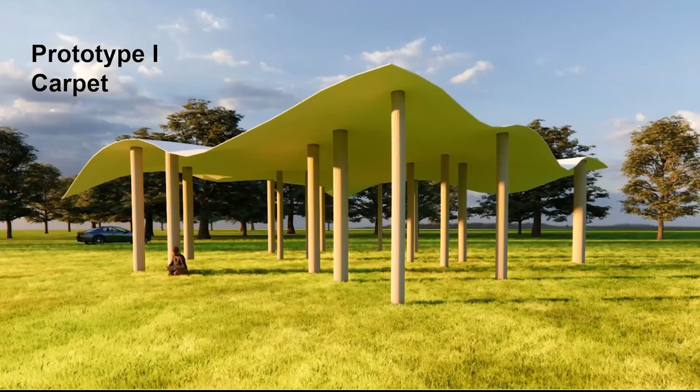So with that, we took on that framework. We built a couple problems of our own to really run through the whole process and adopt this methodology, putting it in a framework that goes end to end, from a user providing ideally a grasshopper model with a tabulated collection of samples, which would be realizations of a model. And then at the end, come up with some visualization and get some models that are of interest to you.

With that first problem, it's a very simple problem with columns located randomly under a carpet-looking roof. We came up with two metrics for this problem - an architectural metric that has a trade-off with an engineering metric. Architecture would be compactness, a way to express quality in architectural terms. The engineering would be simple - economy, pounds per square foot. So with those two, and the model expressed with all those parameters, we boil it down into this latent space that you can navigate and then get out of it a collection of configurations.

If we go to the next one, the other problem was a dragonfly facade. If you were there for the pitching session, maybe you heard something about insects. We did incorporate insects. It's an amazing structure. It's 60 meters tall. Let's go.

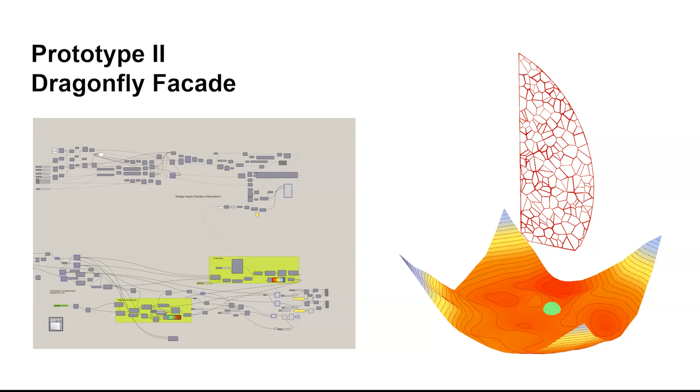It's about optimizing the diameter of the elements of the wing, right? So something very similar in terms that you can express it as parameters. This one is 600 parameters because it's the diameter of every single one of these elements. The other one is much less. And then we showed that one.

Okay, that's fine. We did everything in Grasshopper, but then we boiled it down into a web app that's still in development. Let's go.

This one is in development still, but this is the workflow. And what we really did to the heart of it, the VAE, is to enable it to use a multitude of performance conditions, not just one, because the original authors just had one metric. And then in terms of getting from your explored features back into a performance calculation, they were rerunning their model. So we implemented a neural network to make predictions of what that performance was going to be, just to optimize it.

And I think we can go to the end. The framework is laid out. It's still rough, like anything that comes out of these things. But the idea is to allow a user to look at models with comparable performance to provide their clients with a multitude of options and be able to produce those models with a few clicks and then go from there and leverage machine learning in new ways. Ta-da.

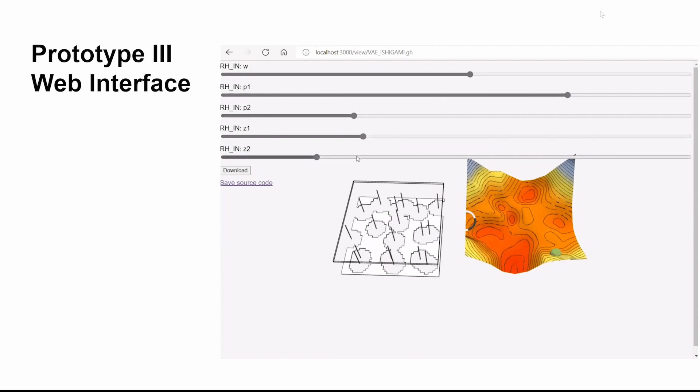Hi. Yes, ShapeMaker. You didn't hear it wrong, because this is a collaboration between ShapeDiver and the Spacemaker folks.

And do I have to advance? Is that what we're gonna do?

And so I'm gonna spend a little bit of time doing a little thing here for Safe Harbor. We're gonna show a bunch of products. There's no promises about us delivering or productizing any of this stuff. Don't make any purchases. There's also gonna be sort of a larger envelope of what we're talking about here. So hold on to your seats, because it's going to be 10 minutes of this stuff.

So we did some Spacemaker collaborations, both with ShapeDiver and with TestFit. What you're seeing right now is a Spacemaker environment with TestFit objects and ShapeDiver objects in the same environment, getting environmental analysis in real time. And we'll unfold how that happened.

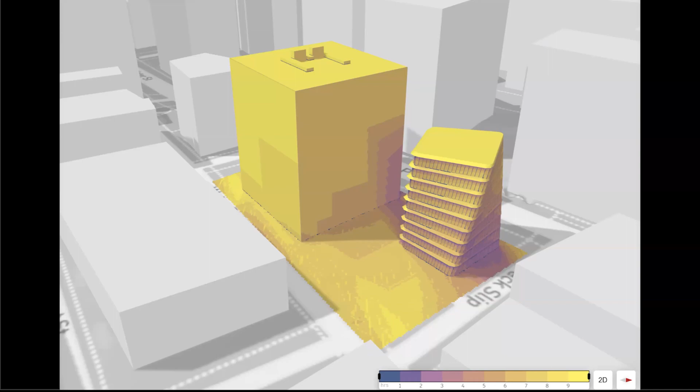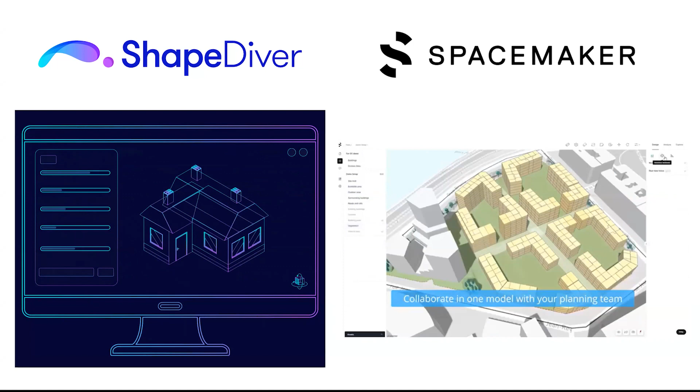Just a little bit about what these two products are before we get into TestFit, which you'll see in 5 minutes. Spacemaker is a cloud-based analysis and design application for early stage design, but we're expanding, where you can position your project someplace on the planet. You can get context for what it is. You can get environmental data on it. You can do your designs in that environment to get impact statements about what your design decisions do for the performance of the building.

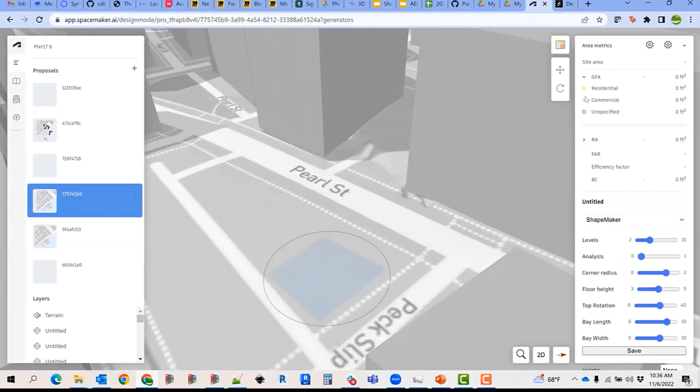ShapeDiver is essentially a very simple way to run Grasshopper models in the cloud and plug them into other web applications like Spacemaker. And so the thing that we accomplished was we took ShapeDiver applications, we plugged them in through the API that is emerging right now into generators, so that you can take sort of arbitrary black box data that's coming from ShapeDiver, generate it inside of the Spacemaker environment, get whatever analysis that definition delivers, and then layer on top of it whatever analysis you want to get out of Spacemaker.

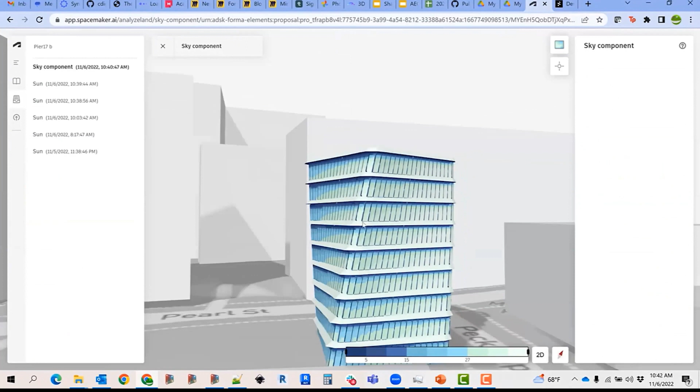So a lot of shapes and spaces and all the rest. ShapeMaker, Spacemaker, all the things. But anyway, it's about sort of how do we start getting these different superpowers all together into the same environment.

The team, there's sort of more names on here than is probably up here, because there's a lot of overlap also with this group down here, which we're going to talk about with TestFit. Really a wonderful collaboration from my point of view on people who had never met each other, getting together into a room and just making some awesome shit.

A lot of what kind of tied this project together is a shared vision about what's important. Automation, amazing. There's usually no single right answer. It's important to be able to see options. Both products are sort of about that. Web services make everything more collaborative, and all these environments really need to be built around the idea of extensibility and customizability.

And so we really looked at this and we thought, what would happen if you can take encapsulated logic and put it into a design environment so that you can share it with people, so you can get more of a collaborative environment for people to work together for sort of performance-based outcomes. And just talk a little bit about how that was put together.

Yeah, so we can build all of these nice web apps which cover a use case, and it has cool AI analysis in the background. But for our community and for anyone here to be able to use it, you have to be able to hack it, right? You have to be able to do these bespoke buildings that we do, and any web app is never going to cover all of that stuff, right? So we need to basically allow people to plug in whatever they want in the back and then display or run the bespoke analysis.

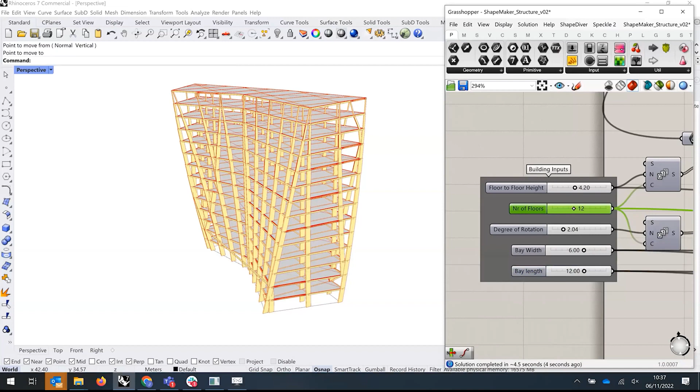Yeah, absolutely. So just to confuse you even more with more names, more platforms. This is basically, if you don't know ShapeDiver, we all know Rhino and Grasshopper, probably. This is the desktop side of authoring your definition. And what we're looking at here, although it might not show up in the videos and the visuals, we are actually

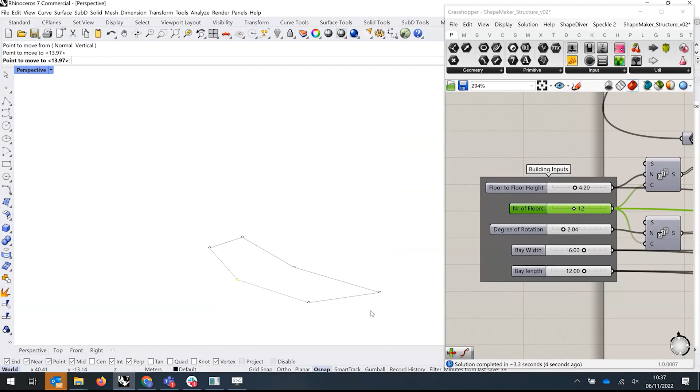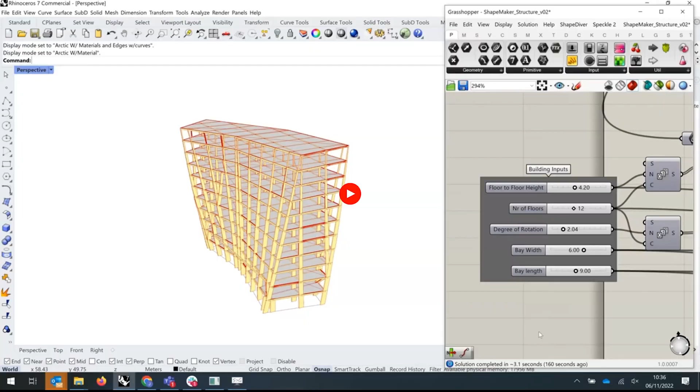generating the structure. The sizing of the columns and the beams is actually calling into Cortex, our AI machine learning model here at Core Studio, through some REST API calls. It pushes basically the geometry, the length of beams, loading, gets the size back, and reports that visually in the 3D viewer. Because of ShapeDiver kind of appifying these Grasshopper definitions, we're all of a sudden able to run them on the cloud anywhere.

So once the Grasshopper definition is ready, we can upload it on the ShapeDiver platform and already get a preview of it, get the API keys and plug them into Spacemaker.

And so I think we'll just play ourselves out with a sort of slowed down video of what we're doing. How much time do we have left? Are we totally out? All right. So thank you. We'll do questions.

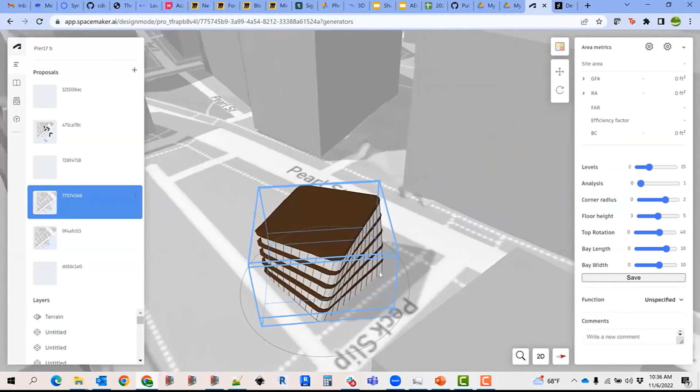You guys have already sort of seen this at high speed, but this is sort of the full workflow of all these glorious pieces of technology coming together in one environment for the purposes of analysis and getting data from your design workflows.

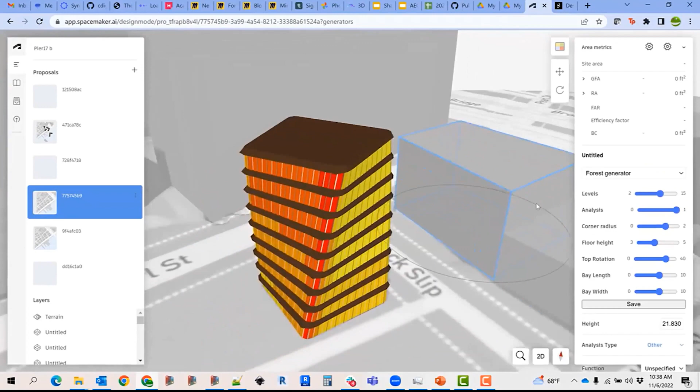I think we can take some questions just sort of as you are scintillated by the glorious demo. Thank you. Thank you. So are the, oh, I've never been accused of being shy.

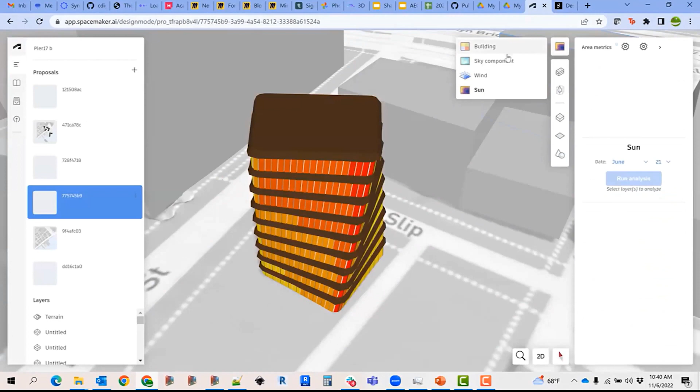So earlier in the video when we saw those parameters and the sliders on the side, are those getting pulled from the Grasshopper definition? Okay, all right. And then you're essentially allowing the user to control them from here. The definition computes and then it gets the results back here. Got it, okay. It's pretty cool.

And theoretically, that's kind of that example. It would be kind of the same framework if you plugged in, like you said, a TestFit solver or even another kind of solver. Okay, cool. Yeah, on the geometry that you actually get back. Got it. And part of the point of it also is that users don't necessarily even need to know where logic is coming from in order to get the functionality.

It's a little small in this view, but I also want to point out opportunities for personal branding that happen within the Spacemaker environment for other applications, if you want to surface the idea of where this comes from and who is responsible.

All right, hopefully this has the videos in it. So we'll go through these slides pretty quick so we can show the demo. We're team schema test. We're from TestFit and Spacemaker. Again, safest of harbors. We're scared of lawyers. We come from large companies. This is hard enough to collaborate as is. So no products, no features out of this, at least no promises.

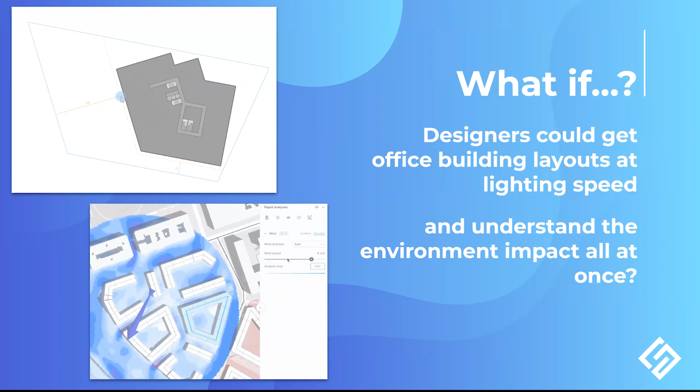So we have a shot, I think, at getting daylighting analysis, microclimate analysis, wind analysis, things that corporations care about for their employees. They want their employees coming into the office. I know we're in the post-office world, but Wells Fargo, for example, announced a massive building in North Texas. So I see a shot at marketability for Spacemaker's neural nets with office, and I also see a shot at marketability where we have instantaneous generation. Cool. Next slide.

So what is TestFit and Spacemaker? TestFit is automated design or feasibility design. It's written in C, so not C++, not C#, but just C. Our engineers are amazing. It's a desktop application, so it's super fast. It's real time. You get that instantaneous feedback that's really important with procedural algorithms. And Spacemaker.

And just to say again, for Spacemaker, the point here is that Spacemaker is different than that. We aren't using that same code base, and we are going to play with anything else that comes along. So just as an example, previously you saw something that was working entirely with services. This is working with a different tech stack. Yeah, so very different on the spectrum of software development or software engineering, completely different products. So yeah, we can go into the live demo now.

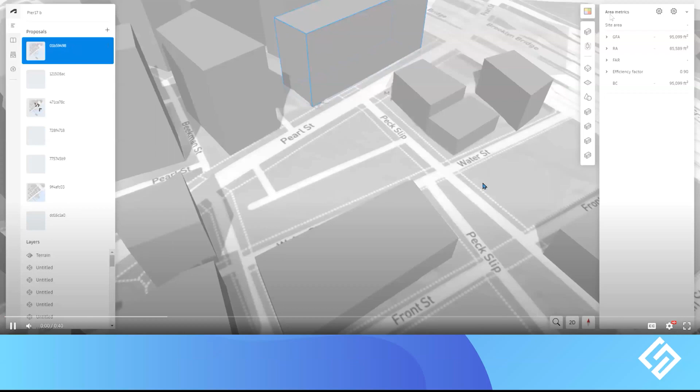Yeah, can I hijack the sharing? Yes. Cheers. Oh, host disabled participant sharing. Yeah. Sure. Ask to start video maybe? Or no, something else. Make host. Oh, okay. Okay. Yeah, I'll give it back. Great. All right, can you see the screen now?

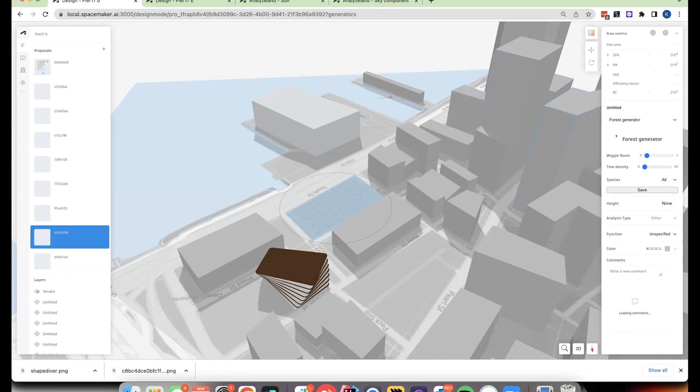Great. So now we're inside of Spacemaker in the design mode here, and let me just remove the Zoom things, they're getting in the way. Okay. So let me just select this plot and select a generator, then choose the TestFit Office generator that we just talked about. And here it pops up running WebAssembly, connecting through our API. And we can change the parameters that they have exposed, and you can see that they're changing live.

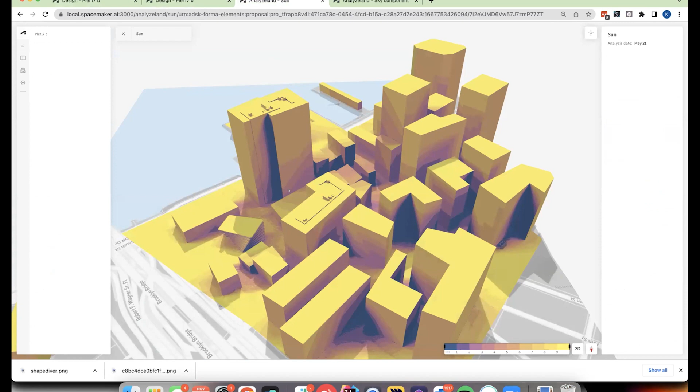Yeah, and I can save them and jump over to, take a second. Let's see, yeah, and then generate another building over here with the other options and stuff like that. I've cheated a bit, because the analysis takes like 30 seconds, and I didn't want to spend time on that. So here you can see our sun analysis being used on the buildings that we just created using the WebAssembly that's compiled from TestFit code. And here's the daylight analysis.

Yeah, so it's super cool to see how responsive this is, running their code in our service. I guess that's a demo. Should I show anything more? Simulations. Yeah. Yeah, okay. Okay, thanks.

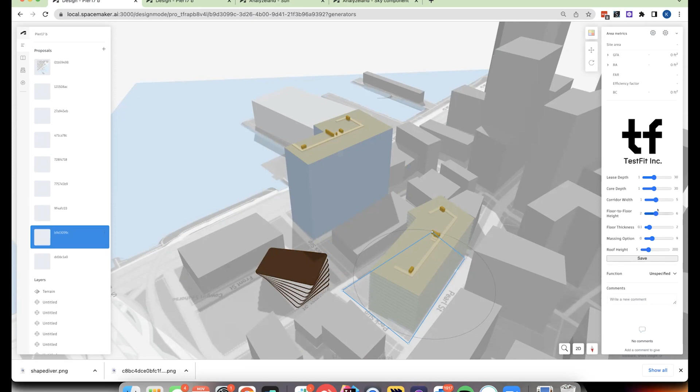So one of the benefits of TestFit is that you guys get like pro forma and metrics out of it. Do you guys incorporate this into this one, or is the data output? We didn't have time to hook it up. We needed another week. Okay. Oh, all right. Thank you.

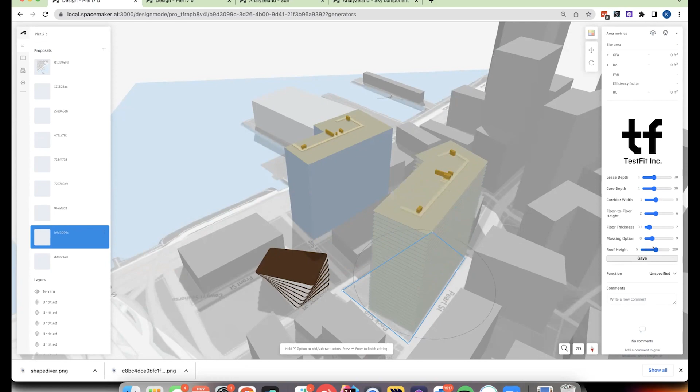So should I stand? I'll stand over here. Hello, everyone. Good morning. So we asked a pretty simple question. What if you could, can you hear me? Yeah. Okay, cool.

So we asked a pretty simple question. What if you could visualize your thoughts, your ideas in 3 dimensions instantaneously? Like what if you could take your dreams for the future and translate them into reality, all starting with a conversation. So this is what we think could be a new paradigm for 3D modeling. And the impact: 3D modeling is a very specialized skill. This could really open up and make design more accessible so that everyone could visualize their dreams for the future. I need to talk more into the mic.

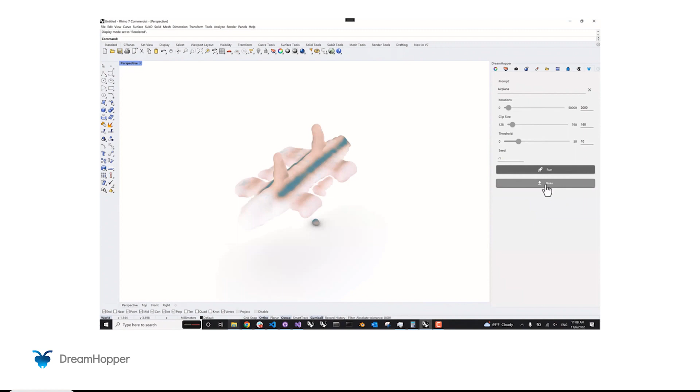Right. So what we decided to play around with is another diffusion model that recently came out that allows you to actually generate 3D meshes as the output. What you're looking at here is a little Rhino plugin that we wrote that allows you to call into that model. The model is running on the server, and we're able to interact with it through the interface of your favorite design software. And as you can see, you can ask it to draw you an airplane, and it will draw you this. But nevertheless, close enough, baby steps.

So can we move forward?

Okay. So we have a server that's serving the model. And because the inference time actually takes a little bit longer than HTTP requests would allow us to deal with, we actually have a Redis cache. So the way it works is, the client application submits a request like, hey, draw me a plane. And then the server spins up an asynchronous process and tries to draw a plane for some amount of time.

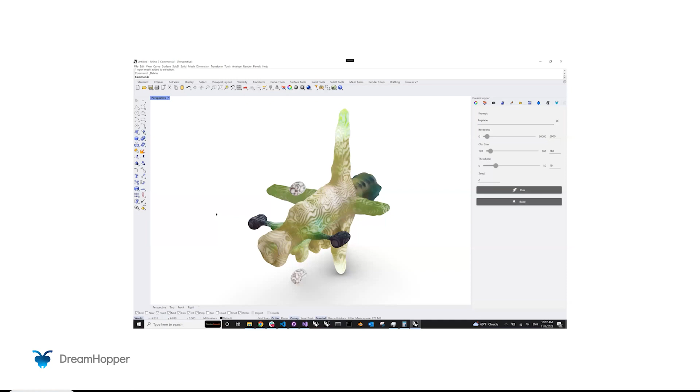And we have a separate route that the client can ping and say, hey, is it ready yet? Is it ready yet? When it's ready, it will be saved in the Redis cache, fetched from there and returned to the client so that you could look at something like this. And yeah, there's some of the outcomes of, you know, it's just very, it's a poetic interpretation of your design process.

Is it? Yeah, you keep going.

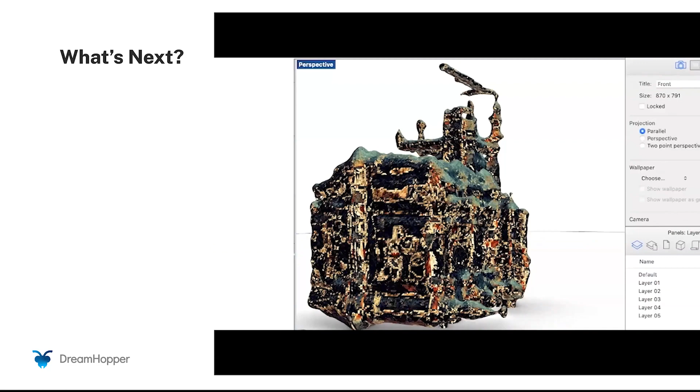So how do you design? Do you design with a pencil? Do you design with a mouse? What if you could design with your thoughts, your words, a conversation with a computer, a dialogue back and forth between talking? And so in this video, saying, okay, generate a building in the style of Dali. What if we push it out, extrude some panels over, rotate around the building, generate some structure, zoom in, and done.

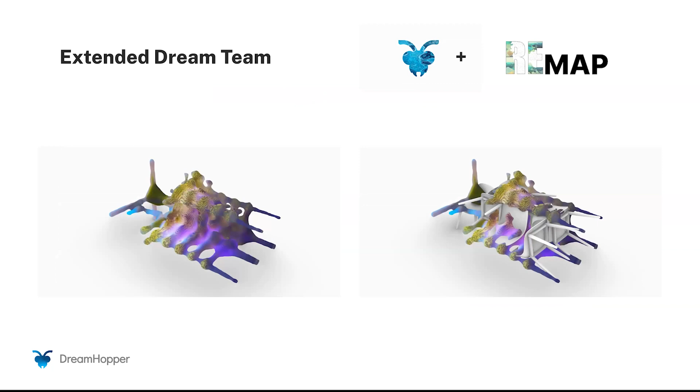So we had the chance as well to team up with the guys from ReMap, and they were really helpful. And we just tested some of these geometries that we generated through AI to populate them with chairs, because why not? How to build them in the office right next to where we're sitting. Yeah, that's pretty much for fun, but it was really good. Thank you very much for helping us with that.

Do you guys have any questions? The ML model that you're running, are you getting polygon meshes directly out of that? Are you having to do any sort of ISO surfacing? What is the data format that comes out of the diffusion model? Technical question. Is it one model that's good for all scales and applications, or is there an industrial design object model and then a space model, et cetera?

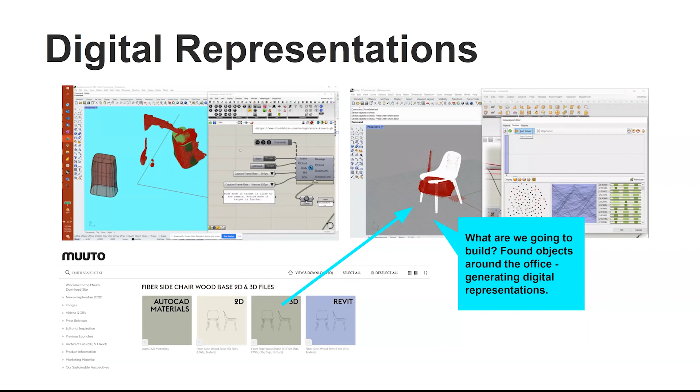So here you can see us bring in on the left the scan and fitting it based on a found object we had recreated and modeled based on some objects in this room. And then on the right side the best fit algorithm that we were iterating on using Grasshopper tools, Galapagos, that James was talking about.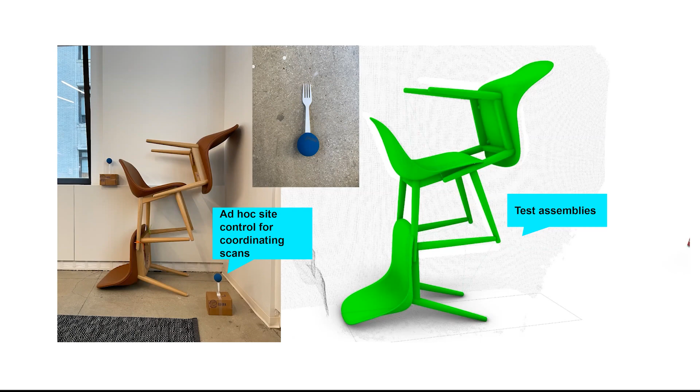To do a quick spiral through the workflow, we figured we'd just do a random stack of chairs. We'd scan them, use iterative closest point, get everything working. And then we also developed some bodega-style survey markers that we use to re-reference the point clouds. So you find the sphere, you can shoot another scan, you can then reorient them together. Results were quite good. So the field tools were a fork, racquetball, cardboard box, paper cube with QR codes on it. And you can see the whole scene there working together.

This is another view of that, looking at the iterative closest point snapping those things really quite tight to the model. Nathan here streaming in from the Kinect into Grasshopper, locating those parts. Do you want to talk about Fologram? Yes.

So we use the ArUco cube in Fologram to identify the physical object to match it with the virtual space, and using Fologram to identify where the current object is and where it needs to be. I think, yep.

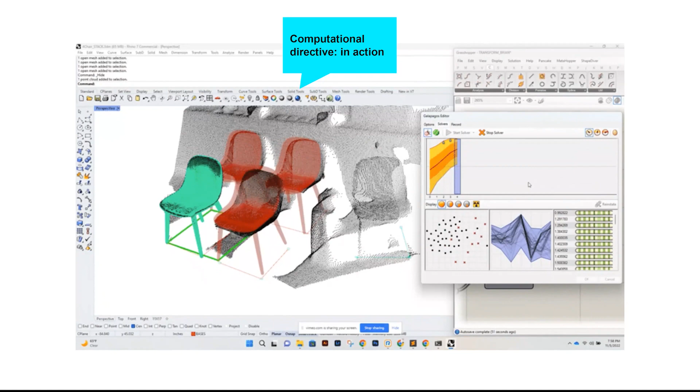One version of what those directives might look like. So here, very simple, we have 4 chairs, and the directive is: from the parent chair, find the minimal amount of movement to square them up. So that's the kind of thing you could think of in the field. You get a general sense of what's happening, and you make the best decision on what to do that minimizes or maximizes or does something good for you.

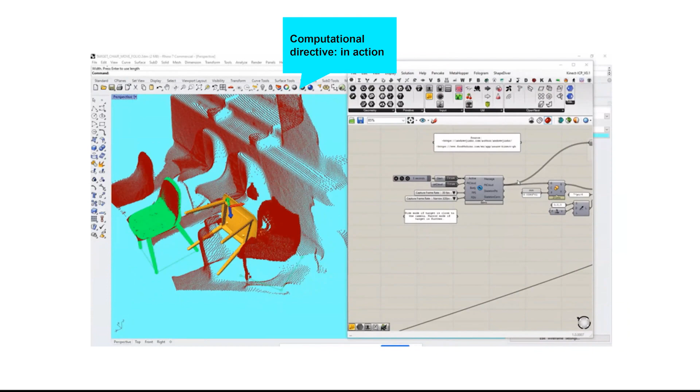Prototype deployment of our found object being oriented to its scan position in space. We had to make some distinction between the other objects so they separate, and then the orientation element directing the chair's movement to its final position was the green one. Yep, and then with the transformation matrix that we got from the previous slide, it got translated and brought into Fologram to view in AR, to direct you and communicate what step needs to be done.

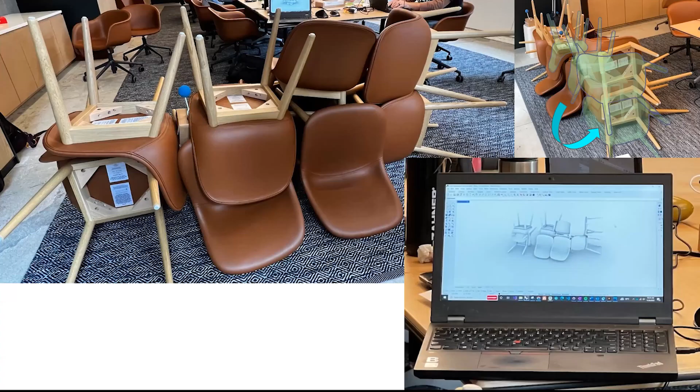So to think about what's next for us, the future is now. We collaborated with the Dreamhopper team and worked on a text-based chair tower configuration. Exactly. So narration to field. So as you can see from the end result, this is something that you would not be able to achieve without the stack of technology that we have put together. We used the computational design tools and the feedback to get the tower that came from Dreamhopper into reality.

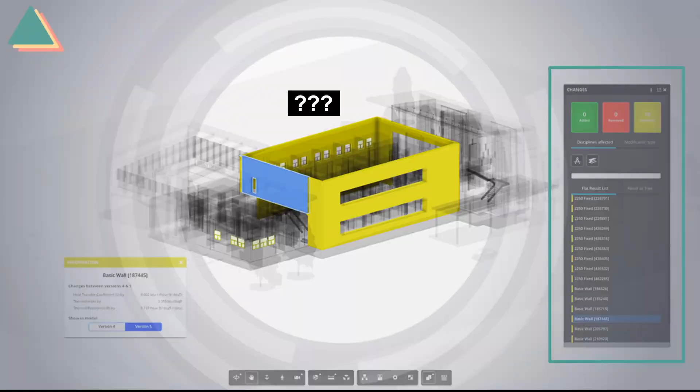So what we wanted to do was understand who needed what information and when. At the user level, the really fine-grained detail of making design decisions, making corrections in the model, and visualizing those changes across time is the highest level. Then we get to what the construction manager potentially needs. They don't care about that fine level of detail, they care about quantity changes. They want to understand how the price is going to change based on those changes through time. And then at the level of a QA/QC manager, someone who wants to understand changes across multiple projects and how that's affecting their entire portfolio.

So we took multiple versions of a real project, generously provided by Matt, and we built 10 files—I'm drawing 5 here. Working with Revit is quite slow, so Vim's got a free exporter. What it does is export from Revit and convert the BIM data into a form that's quite easy and fast to work with. It's got all of the BIM data and all of the geometry.

So using the free exporter, he created multiple Vim files. And then we wrote a script—I wrote a script using a beta API we have with our desktop application. It's 160 lines of C# code. What it did is compare the differences between each of the two Vims, and generate geometry differences and the delta represented as JSON—all of the changes, volume changes, movement, data changes, additions and removals—so that we could visualize that using another format. So we processed about 100 megabytes of Vim data in 5 seconds to create about 200 megabytes of delta information that we then started to process.

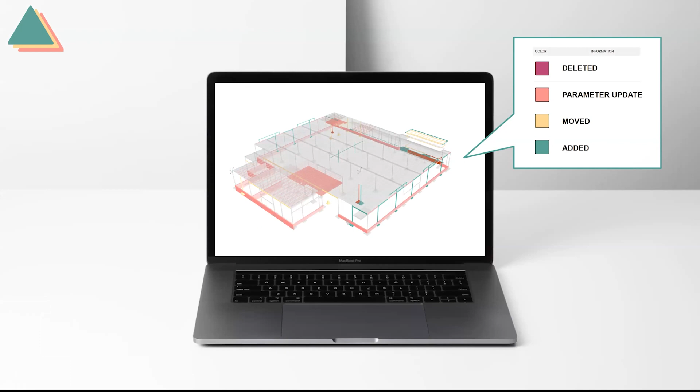One more time, a quick demo of some of the sample models we generated. It's very simple, colors change means there's a different change to the object.

This is a little mock-up of what we were aiming for. Our goal is to allow the user to see graphical changes. It's a standard dashboard approach, but we really want the change step to be the thing the user controls.

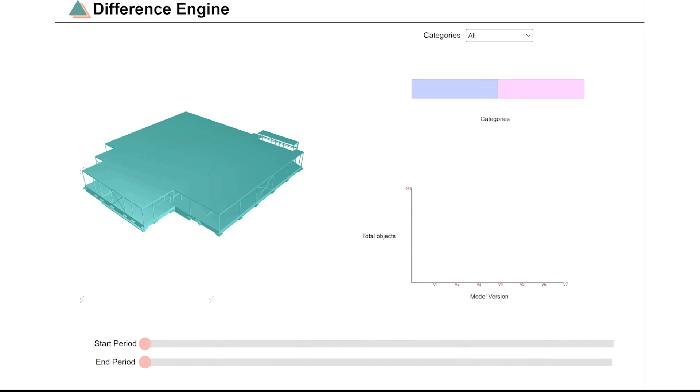Next steps for us - we built this as a Revit plugin because that was the test model we had, but our real goal is a sort of agnostic approach. Anything that can be turned into a JSON can be diffed - it could be ETABS models, Rhino models, Tekla, and many other things.

The key is that we think change happens, and understanding it better is the goal of this tool.

Just theoretically, we were looking mostly in this session at one project, but our real goal is to be able to look at all the projects across the firm. So theoretically, bars across the bottom represent a project.

You have 50 projects - where are the points that changes happen most? Is there some consistency there? Can we make better decisions in the future by knowing when things changed and why?

This is everybody that's up here with me now, as well as Tina online - a very diverse team, mixed backgrounds. We had a great time. Hope you enjoy the tool.

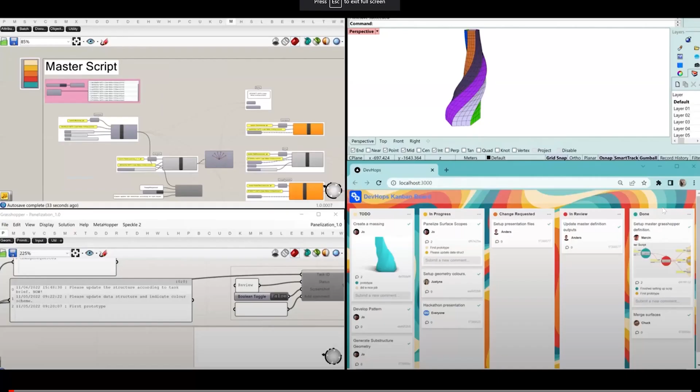Okay, so for the demo, I'll just move to YouTube. Okay, so that's the demo of our product. So basically on the left-hand side, just a second here, you can see two Grasshopper scripts.

The top one is a master script, and this is a direct representation of the Kanban board. Each task is each hops definition, and it has its own status. The script on the lower left corner, this is the actual hops - that's what's happening inside of this function, inside of this task.

So for example, you can see that thanks to RESTHopper, what you will see in a second, I have those different tasks that group into groups. And the coloring is a direct response from the Kanban board about the status. So if the task is in change requested or in progress, it will be orange.

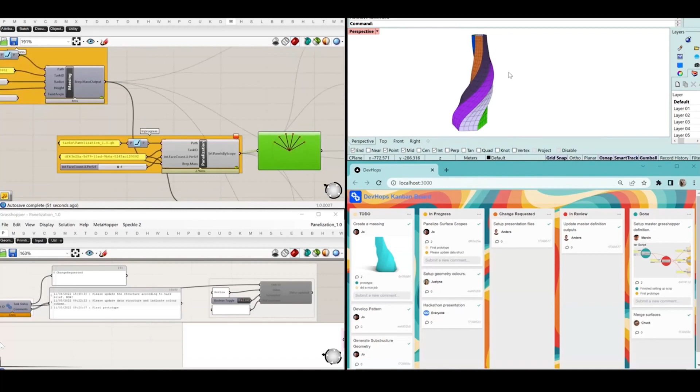So let's say I was a reviewer of the script, I might want to request some changes. So I want to put a task from in progress to change requested because I don't like the result. So now look at the Kanban board - once I send the request, it directly moves the task from in progress to change requested.

Then as a person who works on the script, I can directly read that, okay, for this task I have some changes that I requested, so I need to fix my definition. Once it's fixed, I can post again the results that now it's up for review, and this is done.

And if you look at the board, once I send it, the task should move from change requested to in review. So let's look at the board, fourth column. Yes, it moved. Wow. Okay.

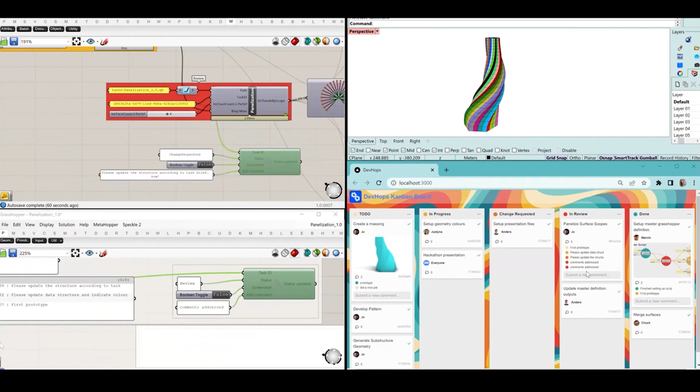Okay, so now as a reviewer, I can come back to my master script. I can see there are changes. If I'm happy with those, I can either approve them in the master script or I can do it directly from the Kanban board. So that's what I'm doing in this example - just write the message, all good, and I can drag down the column and that's all. So both tools talk to our own API, but more about tech in the next slide.

At the end of the day, the five of us all contributed something a little bit different from our own backgrounds to the project. Technically, what we're looking at is a .NET 6 basic server with a database that allows both the front end and the Grasshopper plugin to communicate to each other live.

Both of the clients are polling the back end as they push and make their changes, and as someone works with either the master scripts or is acting as one of the workers working on one of the subscripts inside the hops definitions.

This is all available on our repo, all dressed up nice and available to take a look at - all the different contributions, including the Grasshopper script with some of the most intense care and attention to neatness I've seen in a long time. All available today with a QR code, so you can actually download it right now.

This is us proving that we are all, oh, did you see it? Oh yeah, this is what we want to look forward to in the future.

Things that you could imagine could happen within the next hour or so, if only we had the time - is testing after changes happen, or of course, using this history to actually show it in some way as things changed over time, and so on and so forth.

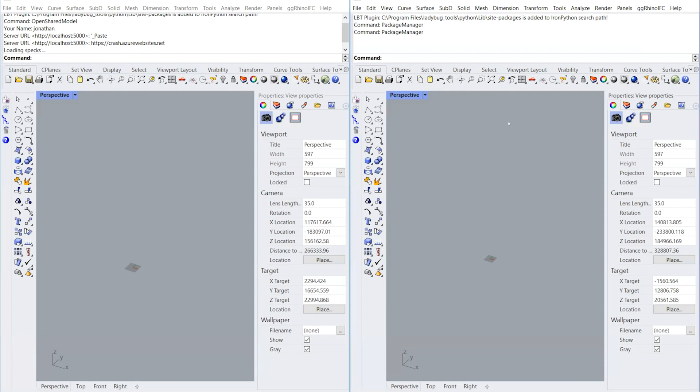So we have here two Rhino instances running. On the left side, I already subscribed and started the server. On the right side, I can quickly show you. You can just open up the package manager, and you can see right now it's installed. When it loads, we have crash here. So I open the shared model.

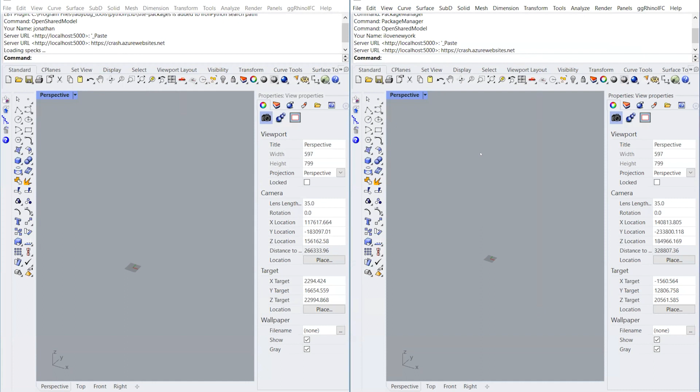I type in I love New York. That's my new name. And I subscribe to the server, and there I am. So now I can start drawing into the pipeline, and hopefully, nothing appears. So probably crashed. Let's see. We have here Curtis, Morteza, and Moustafa at least that came into the model. Let's see what they're drawing. It looks like on my left side, the subscription doesn't work anymore.

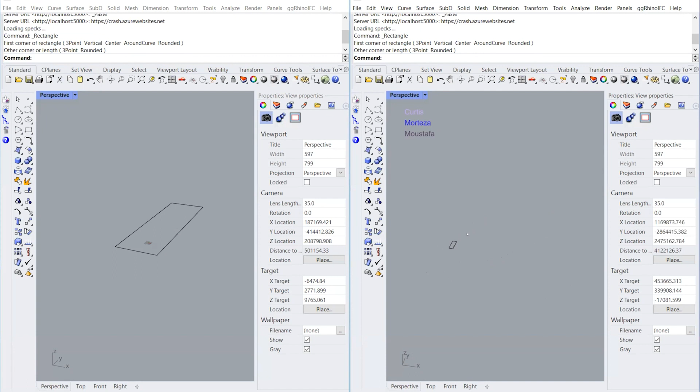Are you guys drawing something? Yeah. Do you see? Okay. It seems like for everybody else, it's, I am just zoomed out all the way. So let's see what they're doing. We have here our users. Everybody is working on it. We can add and modify things together. And once we are happy with our changes, we can release them, and they're getting baked into the Rhino model and released to everybody, basically.

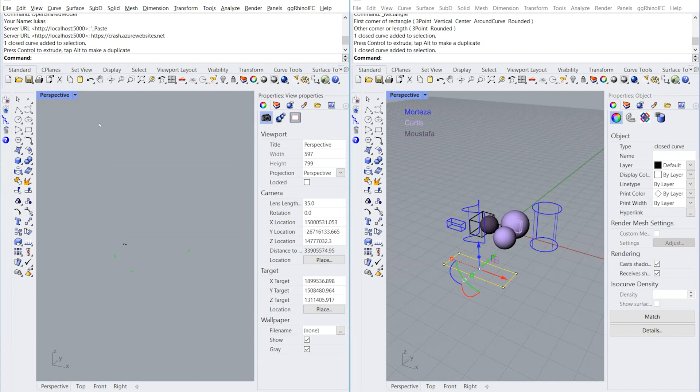So yeah, it's a shame that I can't show this one here. Let's see if I actually can show it in real time working. It's really fast. So I would be sad if we can't do this. Let's see. No, that instance doesn't want to work. No. Otherwise, I would see the names here on the left. I think that one just crashed. But I can technically open up another Rhino instance if I have another minute. If someone could open an issue report for units on our repo, that'd be really appreciated. Seems like units are a bit of an issue there.

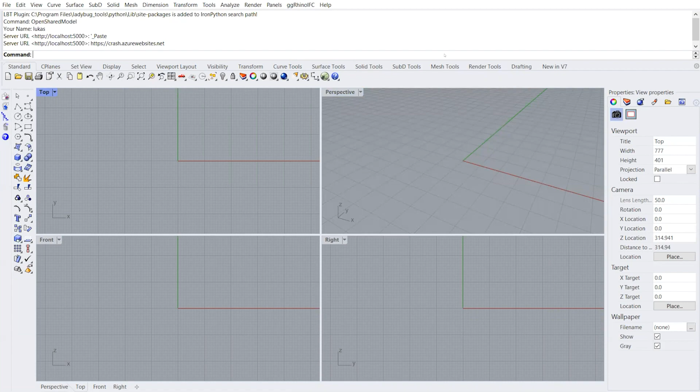All right, let's see. Go back in. We open the shared model, sign up as Lukas, and paste in the URL. No, it should be in there. Wow. Please initiate a Grasshopper command. Anything in particular? There we go. Everything's going, right?

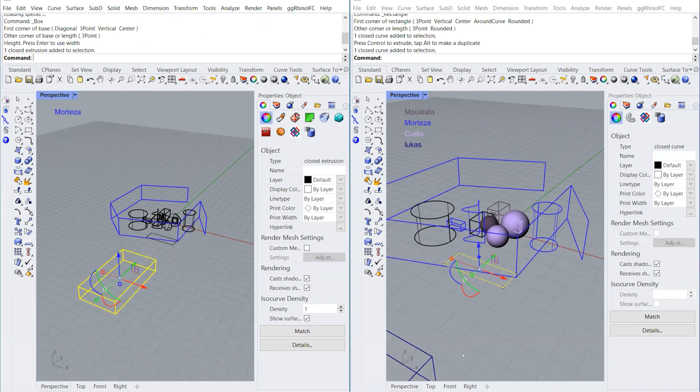Just do it. Oh, sorry. Tough crowd, honestly. All right, you better do it, man. There's going to be threats.

If we bake it in, it should. I mean, if you initiate Grasshopper, you're not going to see the theoretical Grasshopper stuff in other models because we'd have to talk to Grasshopper's pipeline, and we can't do that. If you bake from the Grasshopper script into your model, everyone else will see that. You have to click release. Well, you see it as sort of virtual. And then if you bake and release, then you get it. And here we go. They're baked in. So everyone gets a copy. Everybody gets a copy. Does that satisfy you?

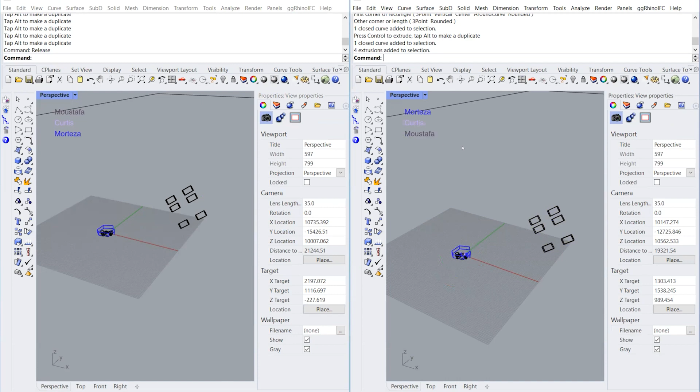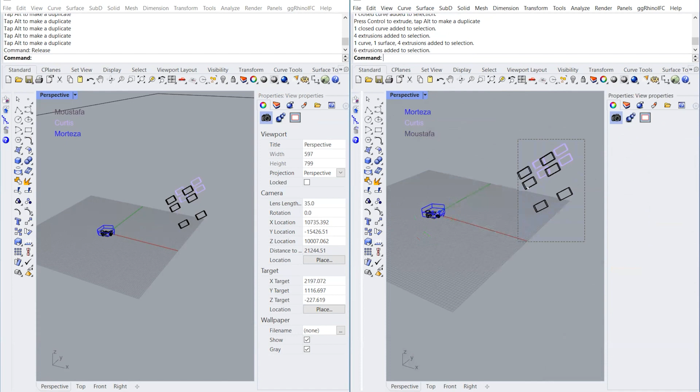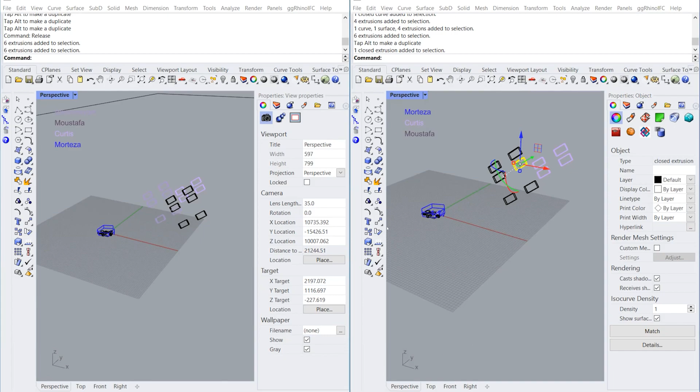Yeah, exactly. So the server itself doesn't try to direct, just bringing JSON in and back. Good. Cool.

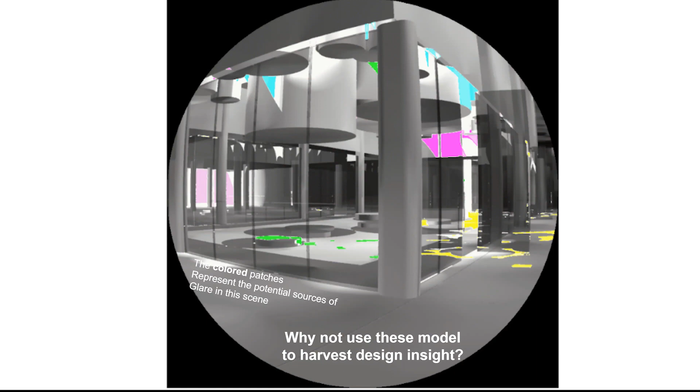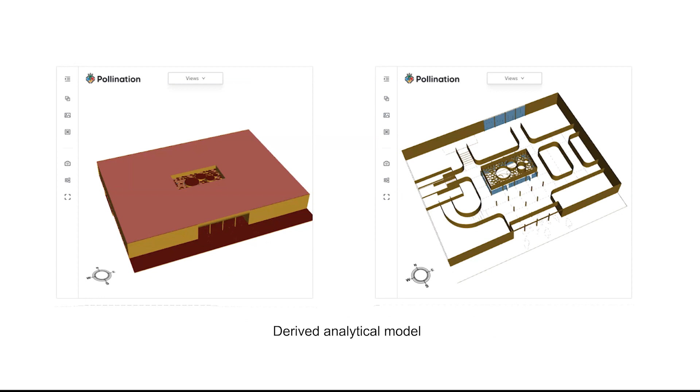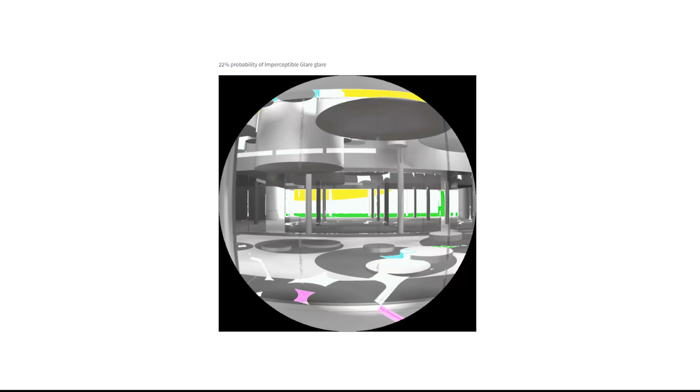If you can please go to the next slides pretty quickly. These are the outputs of this analysis. All the cameras that were in the model have turned into glare analyses. This GIF really shows how the app works. I'm showing you the analytical model here in the web browser, and you can turn layers on and off. You can really explore this model, and it has the layers that you selected in the earlier prompts.

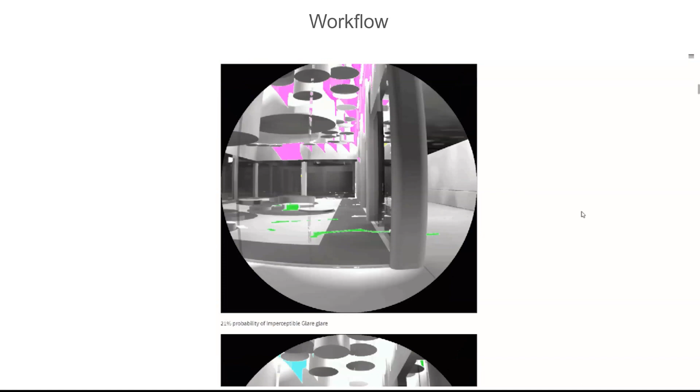They're there, and what it gives you is a series of images. These are very rough renderings because I've used very basic primitive settings in Radiance. But every image has this insight as to whether you are going to experience glare or not. These are point-in-time glare analyses for all the cameras that were set in the model. So that is essentially the app. If we can go to the next slide, please.

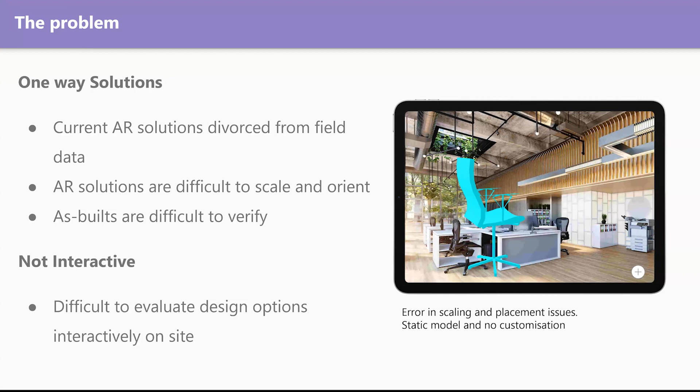So that means that AR solutions are really difficult to scale and orient. And that means that as-builts are very difficult to verify because they don't have this correct scale and orientation. The other problem is that AR is not interactive. So it's really difficult to evaluate design options interactively on site.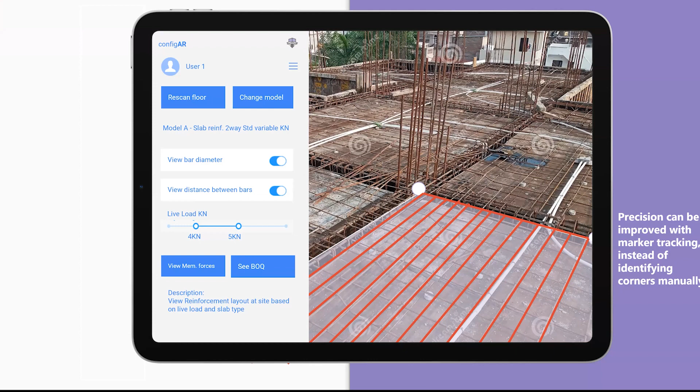So this very quickly is an example of what this might look like in the field, taking a look at rebar configurations and making sure it's properly implemented. And then here's a potential use case where, let's say you're looking at the interior of a room and you have a script for furniture layout. You press generate, and then hopefully in the future, you also add materiality and you can quickly see multiple different layouts for that room in AR.

So, okay, just to wrap up, it's open source, of course, so feel free to clone the repos and play around. We think there is a pretty interesting innovation in the interface between the accessibility of AR applications and the power of Grasshopper scripts. So yeah, we had a lot of fun doing it, and hope you had fun as well.

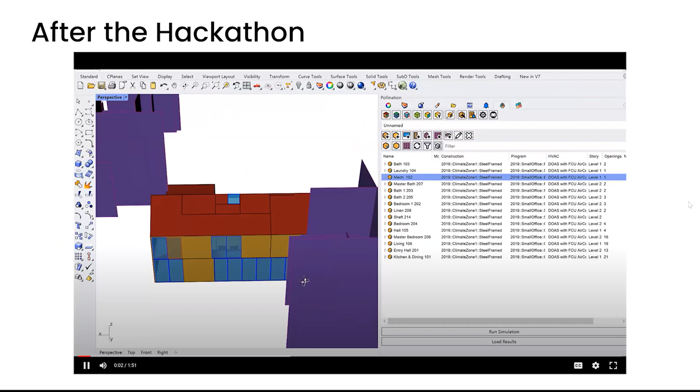So in this hackathon, we used an open source framework called Streamlit, which is an open source Python package. And we used our open source core libraries in Ladybug Tools and our open source file formats to produce a web application that can give you much more control over this process. So this is the actual application that we built. I have a model that I've built as an energy modeler that has lots of detail in it. It's clean. It has all this metadata for constructions and programs, schedules, and HVAC definitions.

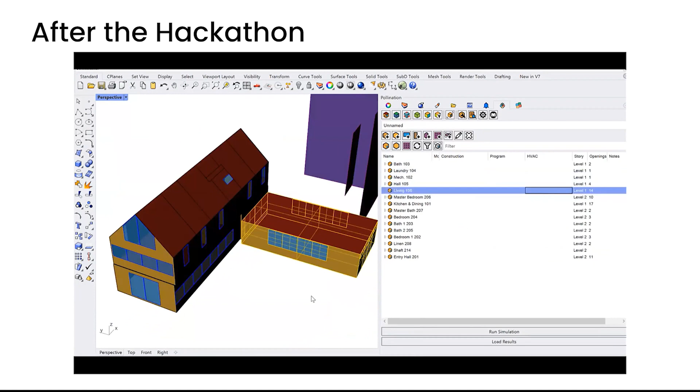And so I was going to use this to inform the design team, but they just sent me this new model. They took my suggestion of making the windows a little bit smaller to conserve energy use. And so I'd really like to merge this geometry into my model where I've worked very hard on these schedules and metadata in order to give them the most relevant updated information. So we'll open up our application. We'll load our base model into that, the starting model that we want.

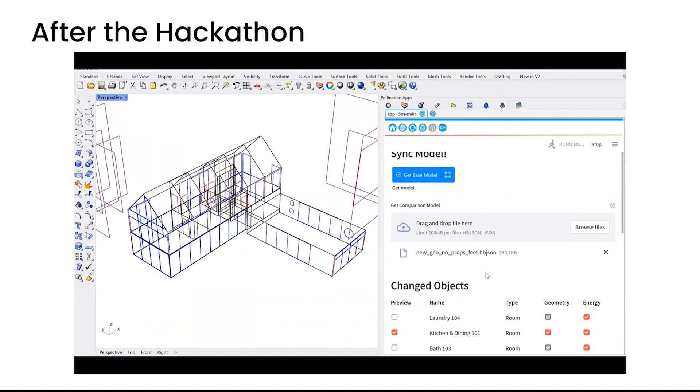I'll grab a file for the exported model with the most latest information that has all that geometry, but none of the metadata. And I will run a comparison report on that in order to give us an actual full diff of all the information in the model.

So we're seeing just the rooms where the geometry has changed. I can see what's happening there, and whether the energy property has changed. Of course, all those properties changed in this case because there was no energy information, so I can say I just don't want to take any new information from the energy model in this case.

And I can say, all right, maybe I'll just look at a few of the rooms here. Maybe I'll look at this entry hall and say, is this geometry make sense? Can I merge this in? Maybe I actually don't want to merge this in quite yet.

I'll uncheck that from the geometry and I will merge that all together into a single model, which I can then open up, basically get a new updated model file with my energy properties, the geometry from the latest model, but just the geometry that I wanted from that checklist that you saw there previously, right?

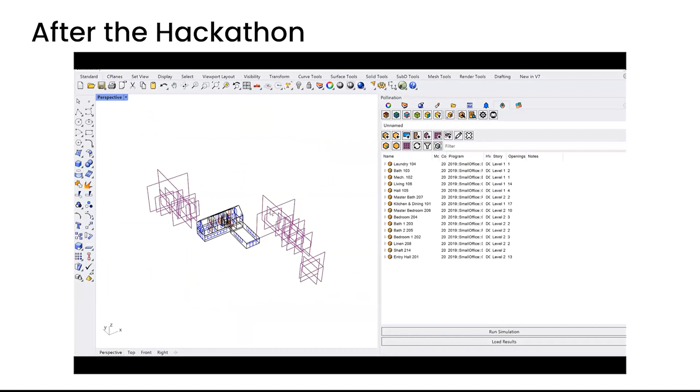So this is that updated model with the smaller windows for most of the rooms, except for that one that I unchecked. And it has all of my nice energy modeling data here so that I can go and now give relevant design information, relevant feedback to the design team in a timely manner.

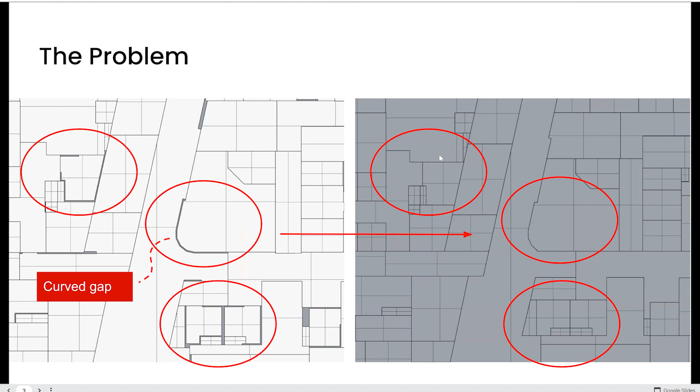This is the problem that we are trying to solve. So what you see, this is the real model. On the left side, these are the models that come from Revit, a hospital building. All those gray areas that you see shouldn't exist. On the right side is what needs to be. So you have to fix it.

The current solutions are manual redrawing of the model. Takes days to weeks. This is what energy modelers, people who do tailoring of the model, do, and they charge you for that. And then the other thing is to align the grid by users. This is the one that is available, takes hours. It's currently available only in Pollination CAD plugins.

And you can do it like this. So you just draw the lines and you say, okay, these are the grids that I want things to basically align to. And it kind of takes it from 3 days to 30 to 60 minutes for every floor. So it's good, but it's not good enough.

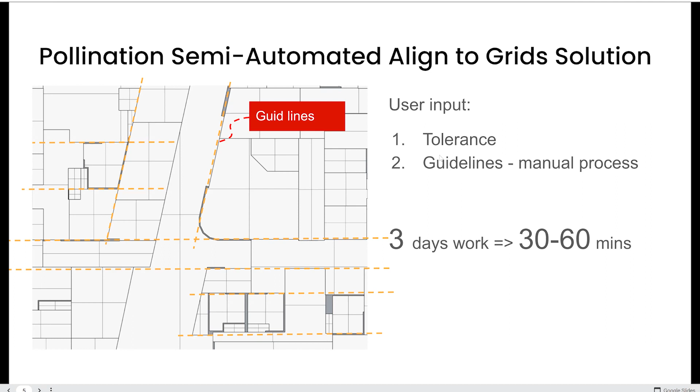So what are the possible solutions to solve this? We started thinking, okay, what if we use graph neural networks to teach the machine to find the problems and fix it for us? Or can we use any geometrical solution to find and fix these problems?

So when thinking about graph neural nets, you saw some great presentations when they talked about machine learning, but I just wanted to highlight that we see and use graphs more than we maybe understand. They are everywhere. Your Grasshopper script is like a graph. The floor plans that you deal with as an architect are also a graph. If you're a structural engineer, every model that you build in SAP is nothing but a series of nodes and elements that are also a graph.

So in terms of preparing the data, we need to set up our own synthetic data. And we're using a generator to put the good data together, and then we intentionally destroy it, just so that we can have bad data. And then so that we can train with the bad data, looking for the ground truth.

So the most intuitive way of doing this is your graph is defined as nodes and edges. That's the most basic way. And it may sound intuitive, but there are some issues with it. For example, if you have 2 floor plans defined as boxes with 4 nodes, if one floor plan is intersecting the other one where there are no defined nodes, there is no way for the graph to understand this intersection.

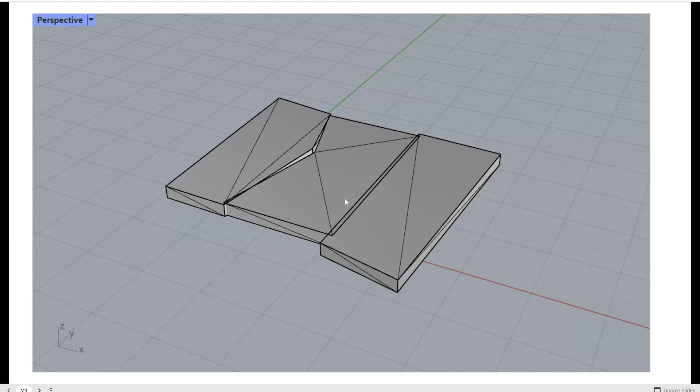This isn't really a problem with mesh fix. Mesh fix needs the vertices to be joined, and they weren't, so it just didn't work. Then we tried a few plugins, some made by people in this room, I won't name them, didn't work. Of course, we already tried snap to grid, didn't work. Topologic beam - hey, have you solved this before? Didn't work. So we're just like, okay, what are we going to do?

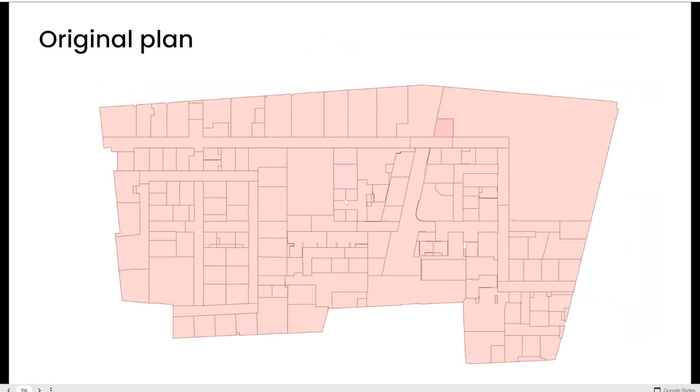So we took the original plan and wrote an algorithm in Grasshopper for now, but it doesn't need Grasshopper or Rhino. What it does is basically suggest fixes based on a few parameters of how accurate you want these things to be, and it weights these lines, and based on that, it fixes it. I know you can see all the differences between the two.

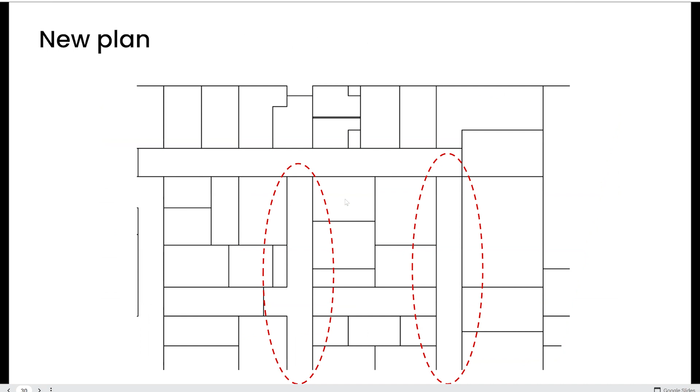No, you can't, so here's the thing. This is the first one - do you see these hallways down there? These things kill energy models. So this is what you get. We still have areas that we have to work on - that area on the top here is not resolved, that's something to be solved still. But this is already saving hours and hours of work.

So, conclusion: like everyone else, there is potential, further development, we have to do more. The things we can do more is we can feed this - we didn't feed real world data, but we have a lot of real world data we can feed to this algorithm to make it better. The other thing, we already started to integrate the geometry one in Rhino, Revit, and Web, so everybody can use it.

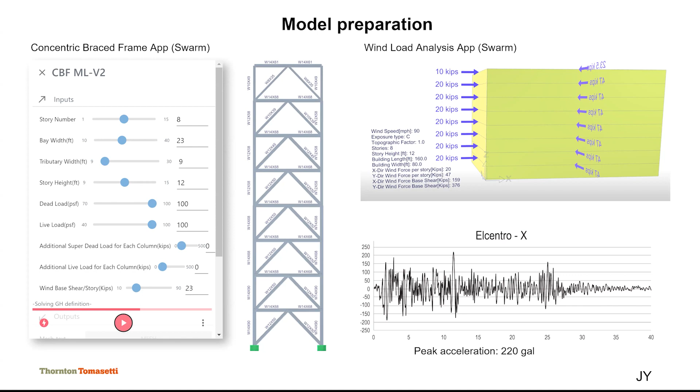We used that in the time history analysis. Totally there's 40 seconds duration, and the peak acceleration is 220 gal. So that is the elastic analysis output for this time history analysis inside ETABS.

Yeah, we can play this video. Unfortunately we cannot hear any sound. So that is the Unity output to show and visualize this seismic response.

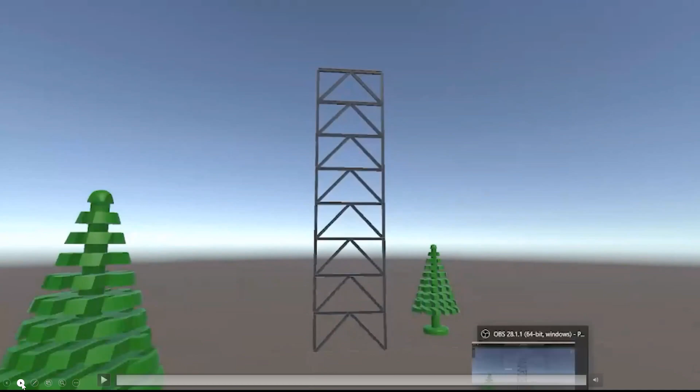If we could hear the sound, that would be much more impressive. Sorry about that. Let's go to the next one. This is a detailed animation of some part of this frame. Unity can change the camera, so we can move the camera and get very good animations here.

In the future we are going to model more elements into Unity, like wall elements and slab elements, and also show structural failure progression under a strong earthquake, to realize the damage development across the whole structure dynamically.